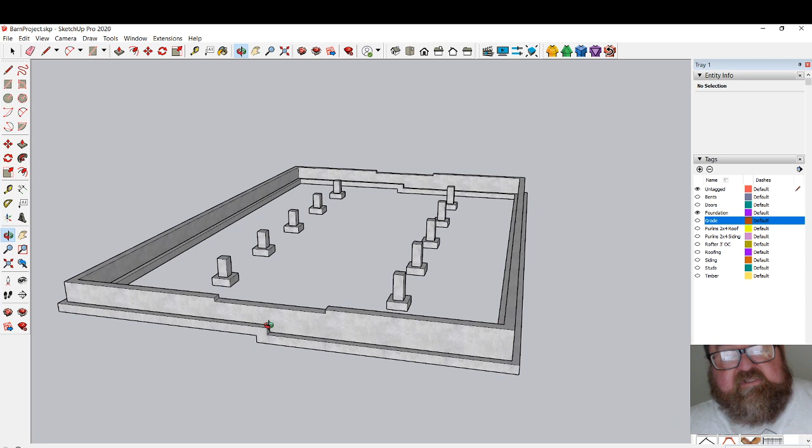But first, let me explain what I'm doing with this. I'm putting into the budget, or at least one step in the footing, in case our site is not perfectly level. So if we do get it graded perfectly level and we don't need a step down in the footing, then this foundation will be cheaper. So that's the point of that.

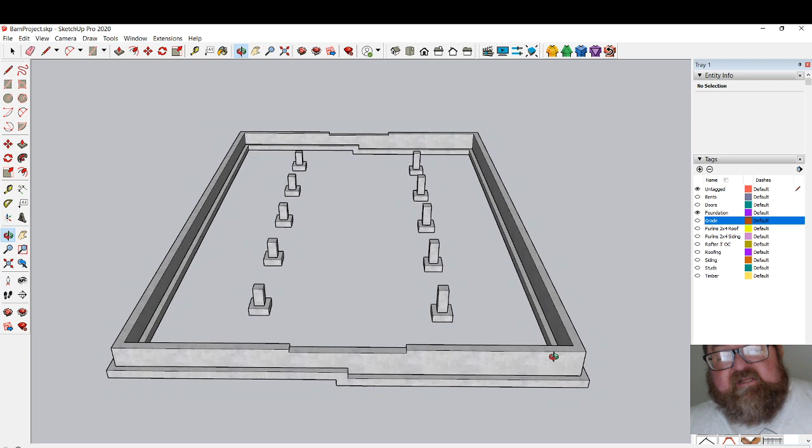I'm kind of assuming it's going to have maybe at least an 8-inch fall over. I mean, this is like 60 feet. This is a big barn, okay? It's 40 feet by 60 feet. When I say big, I'm talking about typical barns for this type of use.

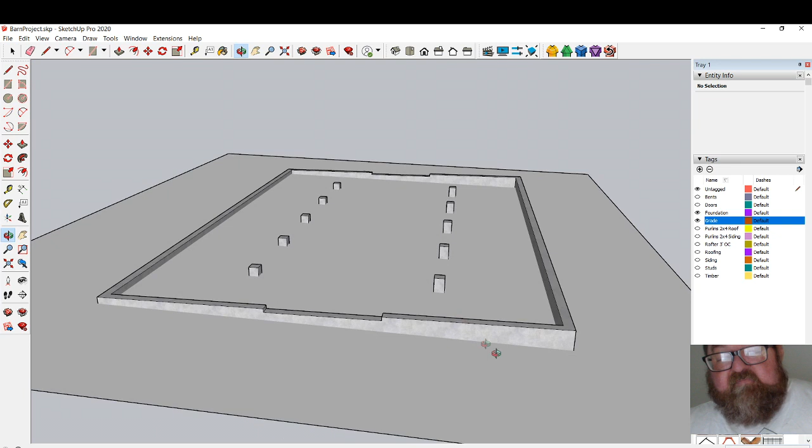But anyway, let's turn on the grade here. That's kind of where I'm assuming the grade might end up. Again, if it ends up being perfectly level, which you don't necessarily want, you want at least the grade around your building to slope away from the building a little bit. But that would be our budgeted grade or our estimated grade. And then that would allow us to have our barn up out of the ground.

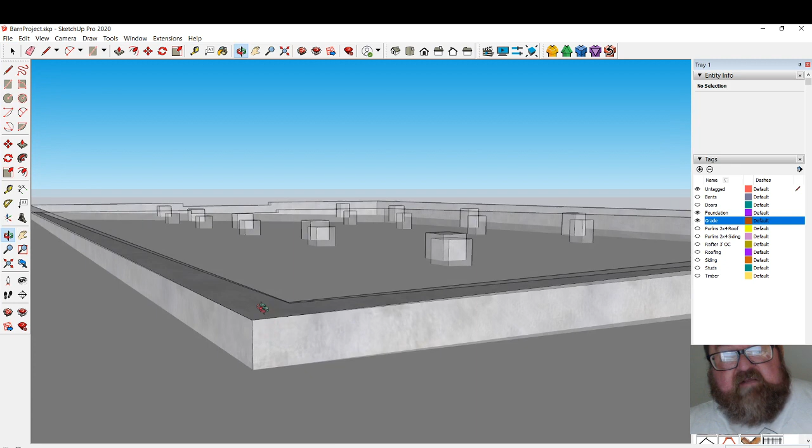You see a lot of these people that make barns that are for just typical livestock uses. They'll just pour footings in the ground and the post will come right down to the ground, and there's really no way to seal out critters, and you're going to see that in a minute.

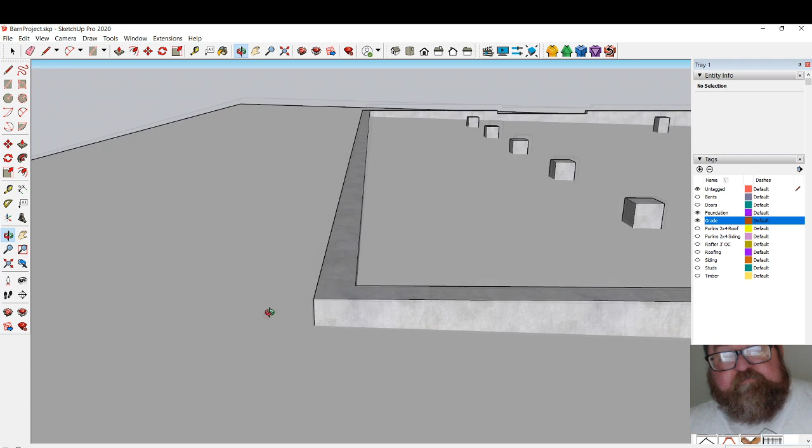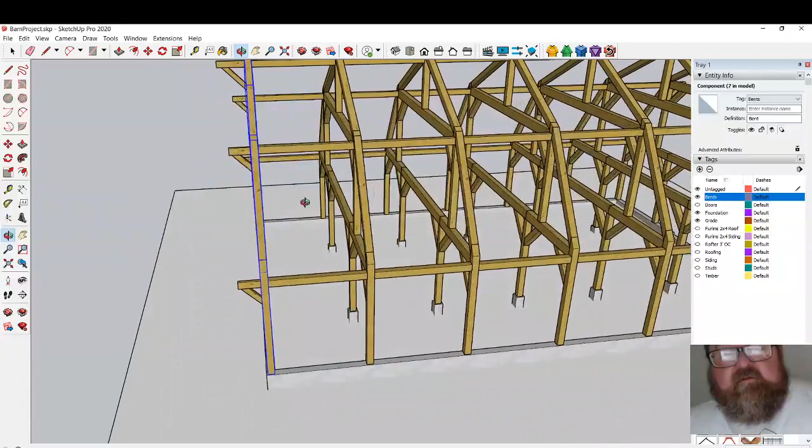So the next thing let's look at are the bents. And those are here, which is our superstructure for the barn. The actual bents are these individual bays of timbers here, like that. And I'm looking at possibly actually stick building these because they're so large.

And I talked to my crane guy. I actually had him watch the video. This is why we do videos. I can send them to people and say, look at this driveway. Look how far it is. Look at the condition. Can you get a 50-foot boom truck back here?

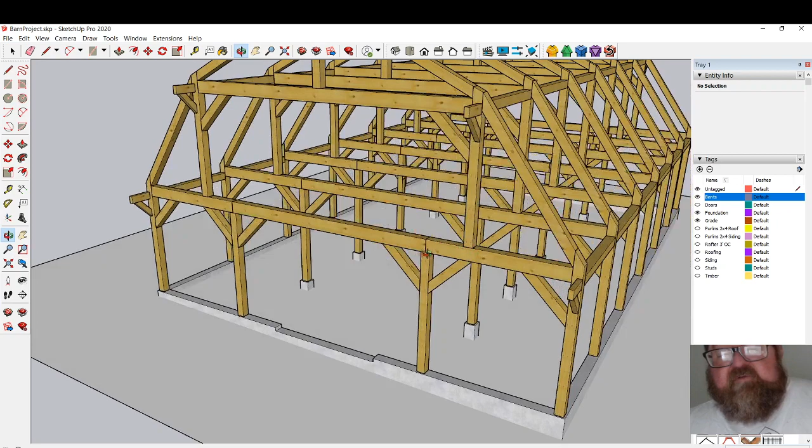And he's thinking about it right now, but I've got this plan B in my head where we would literally just stick build these bents. So we would put our 4 posts up, then we would put our beams on, these horizontal beams, and we would do that all the way across. And then we would sort of make this a temporary platform if he didn't want to put the joists in here. If he does want to put the joists in here, we would go ahead and put them up.

Then we would have a platform to work off to set these 2 posts on each bent, this one and this one. We would mount this beam. And of course, we could possibly mount this beam to the post on the platform we would build and then raise it up.

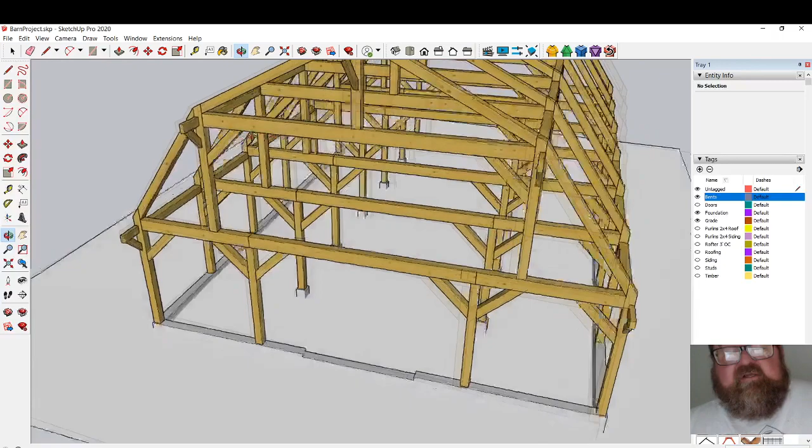And then once we got all that second story platform built, the rest of it's kind of easy because this is only - is it 6 feet tall? Yeah, 6'6", but easily managed by then. After looking at the site, I mean, it's funny about cranes. You know, these cranes can be huge.

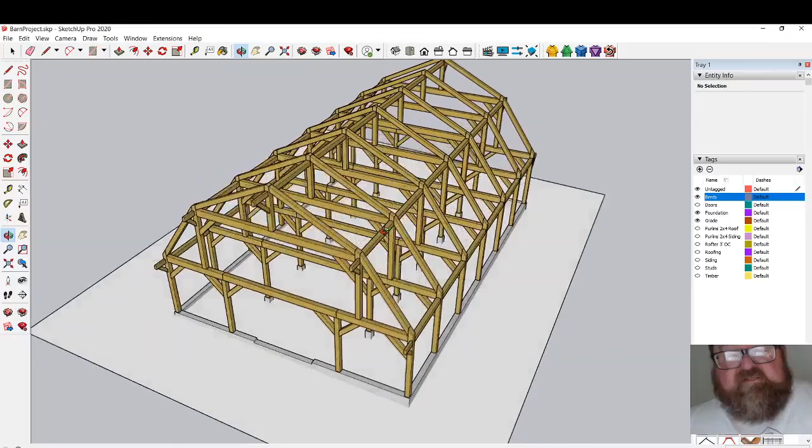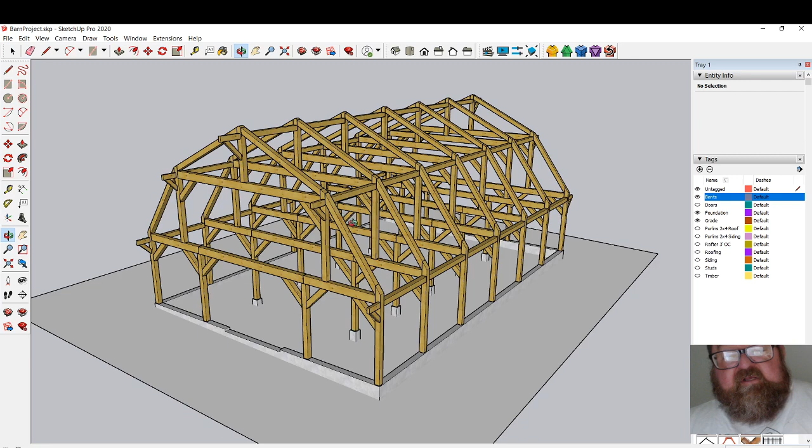They have different trucks, but we'll look at this, and of course, for the cost of the truck for a day, this is the kind of thing you have to decide. Do you want to pay $1,000 for one day, or maybe $1,000 for 2 days for a crew to be able to do it? In other words, the cost may end up being close to the same as far as the labor. Because even if we build these bents on the ground like you would traditionally and stack them up, you still have the labor of that. So anyway, that's just information for the owner to be thinking about.

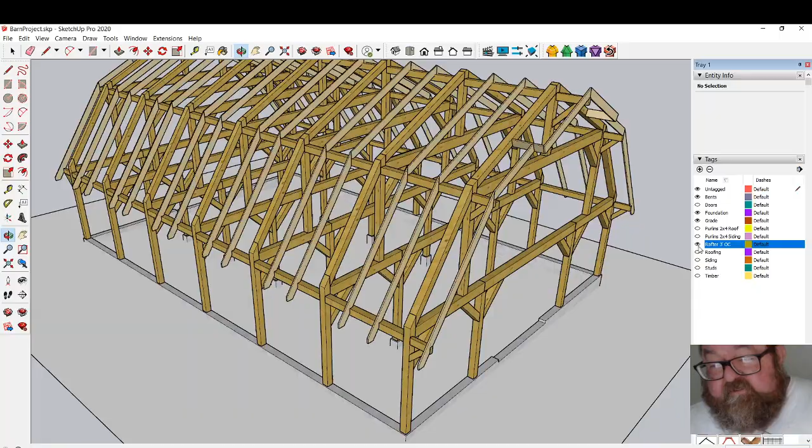So once we have our superstructure up, we would have these intermediate rafters. What those are going to do is just support the purlins, because a 2x4 purlin won't span 10 feet, you'd be like a trampoline in the middle of the span if you ever had to walk on the roof. Of course you can't walk on this roof, but that's just a medium density framing method to support the purlins.

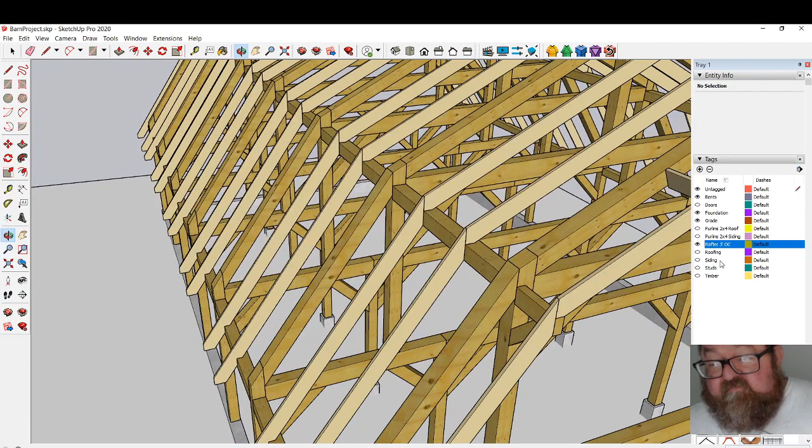Which I'm going to turn on next, roof purlins. There we go. So you can see they form the structure for the roofing to sit on.

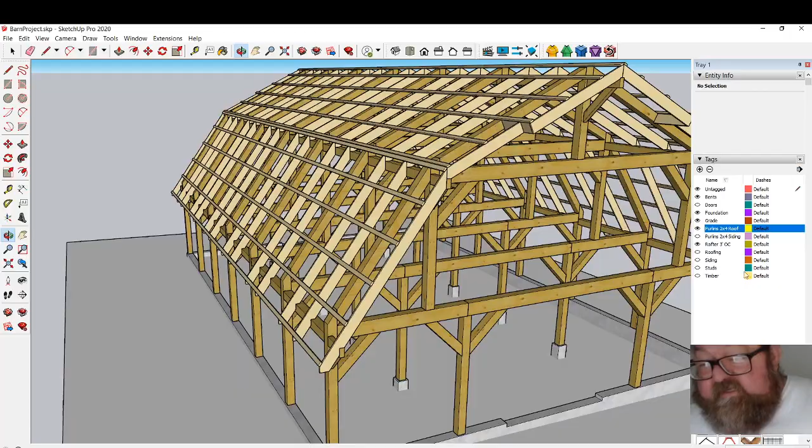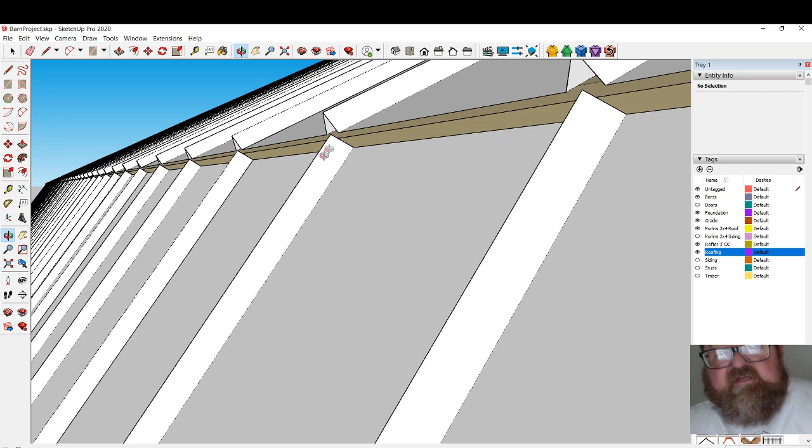And then let's just go ahead and turn on our roofing, which I'm showing just a 5V metal, that typical metal. And then you have your edge flashing to cover up the edges. I'm going to come up with a detail up here where there's a piece of metal that comes out and laps over this lower piece at least 3 or 4 inches, and then this roof goes on top of that.

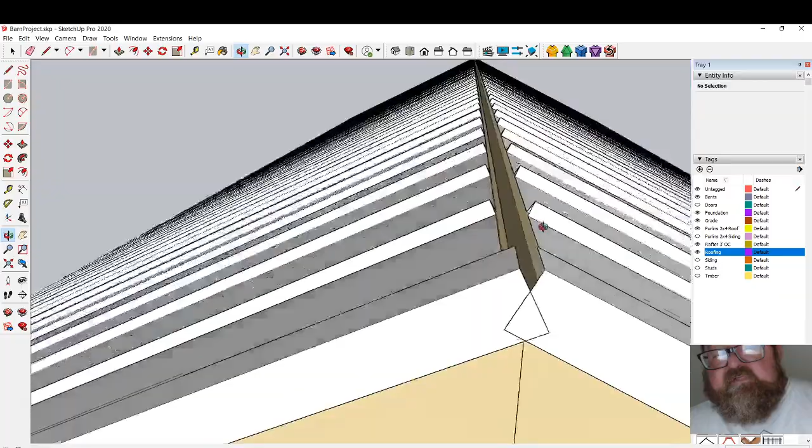That would be your connection between, I don't have that shown yet. I got to put that in there, and I also have to put the roof cap on, which is just a bent piece of metal that sits on top and gets screwed down.

Okay, and then we have this kind of neat detail. I've always liked this, where part of the roof, and it's mainly, I've always thought this was to protect the door below. Let's turn on, if I can get my scrolling going good here, let's turn on the studs.

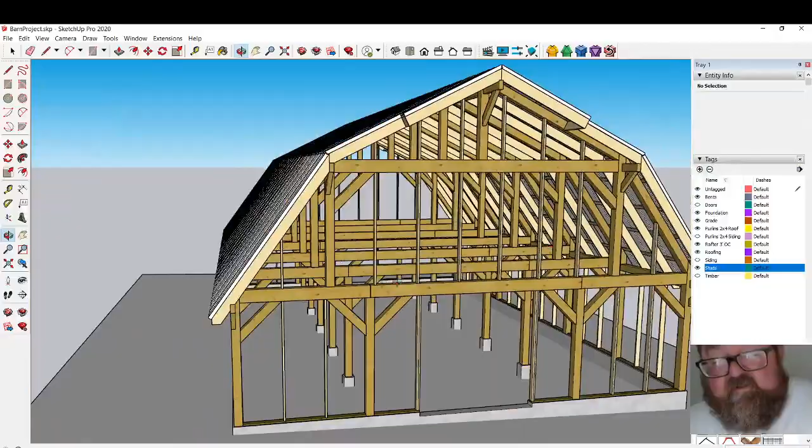So the studs are kind of the same thing as the purlins. They just form sort of a backdrop for the horizontal purlins for the siding. And they're still spaced out pretty good, it's not like we've gone in there and put them on 2-foot centers. I think they're on like 3-foot centers. It's just enough to keep your siding from being wonky.

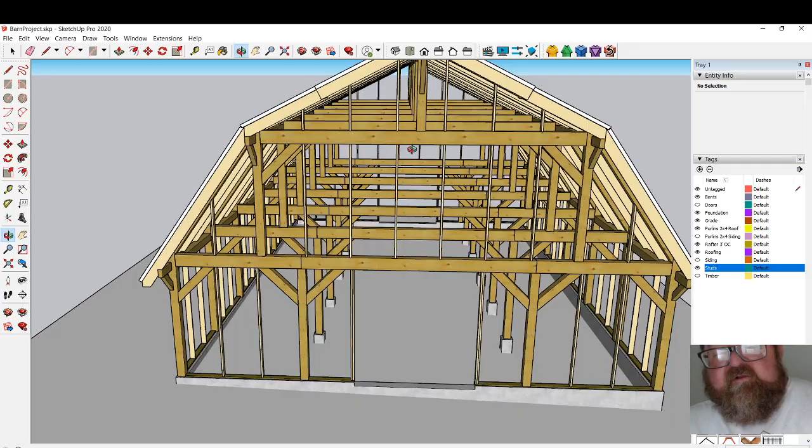But the reason I wanted to turn them on now is to show you this 10-foot door and how this extra overhang up here, get it at an angle where you can see it. It may need to come out, may need to run it out another foot. I think it's sticking out 3 feet right now.

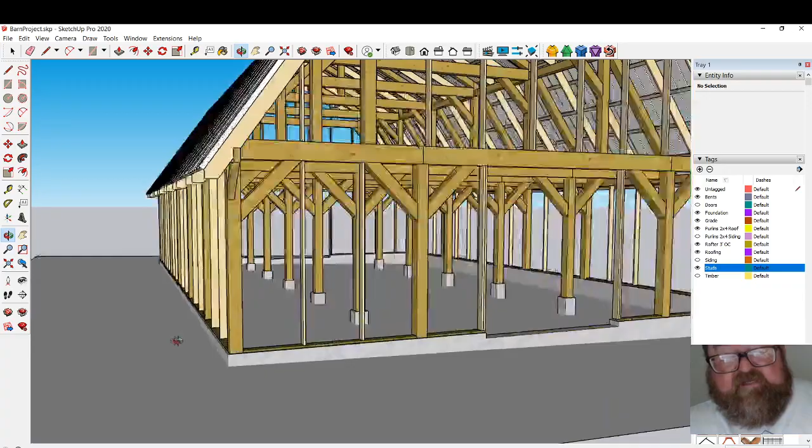They want this barn to be good and weatherproof, for almost like a situation where you could build part of it out to live in. And that's why I have the foundation the way it is, because now, since you have this nice foundation, your siding, let me turn on my side purlins. That's why I had the structure set back 1.5 inches. These purlins can come down and they're flush with the foundation.

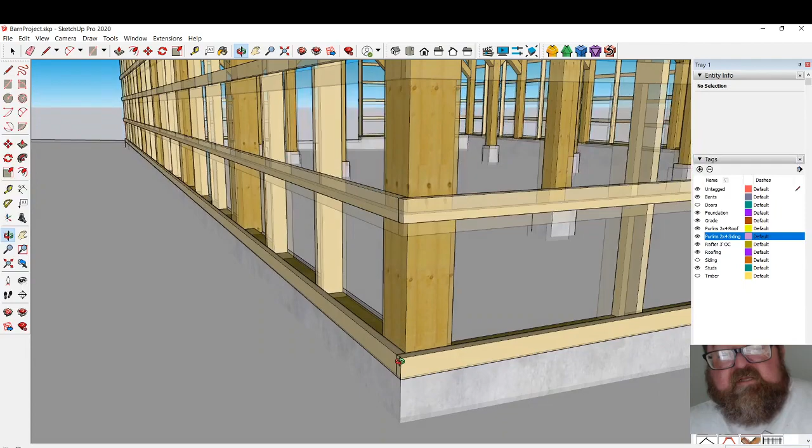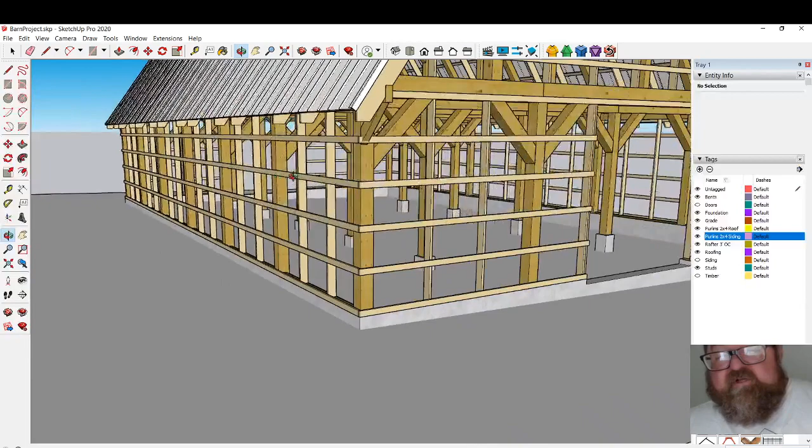Okay, and then of course, again, you see them running on 2-foot centers. We got the roofing, the roof purlins can be on 3-foot centers, but I think if we're going to have board and batten, we need the horizontal siding purlins to be on 2-foot centers, which actually works out pretty good because you got a 10-foot door, and one comes right to the top of the door, and it worked out pretty good. Helps form the opening for the door.

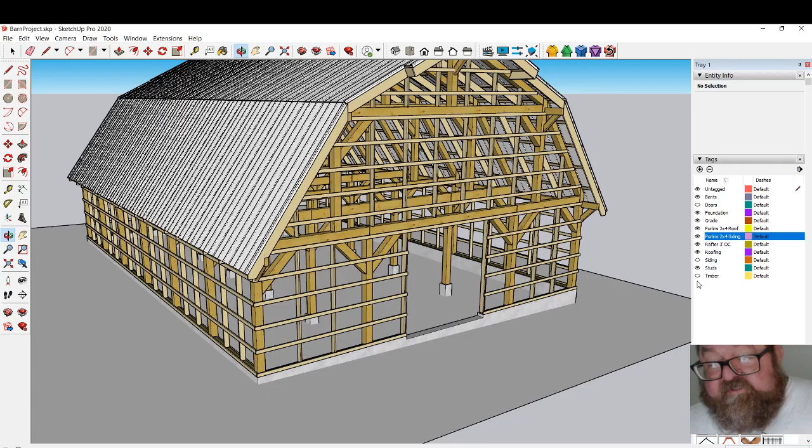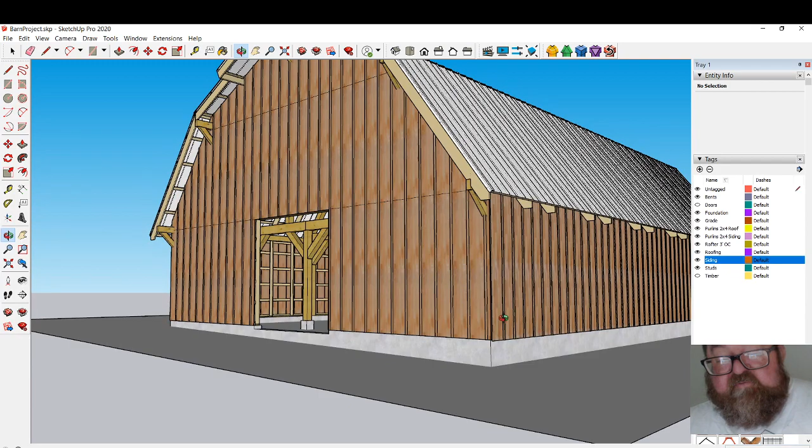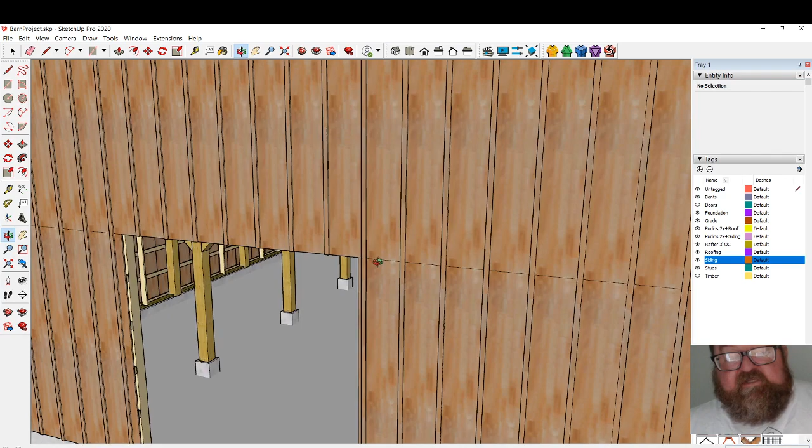But these lines coming across here would be your 10-foot boards. So 10-foot boards would go all the way up on the sides, but at that line you would just have a row of like Z flashing behind the battens. Unfortunately, we won't be able to get boards long enough to cover this whole front, so it's best to plan it out ahead of time, where it makes sense to stop them at the door height and then go another 10 feet and finish it out like that.

And then our doors, we need to come up, I was going to put a sliding, like a typical barn door, but if you ever want to weatherize this thing in the future, you would be better off having hinged. I don't have the hinges shown yet, but just two leaves, two big leaves that would swing out around these doors.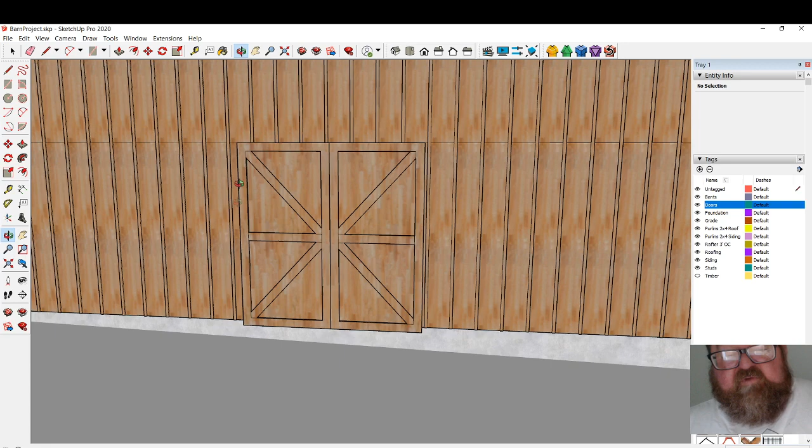You can weatherproof them better. A big barn door that just slides back and forth, I don't know if you're not familiar with those, they're not, you can't weatherproof them. The track for the door makes the door hang out away.

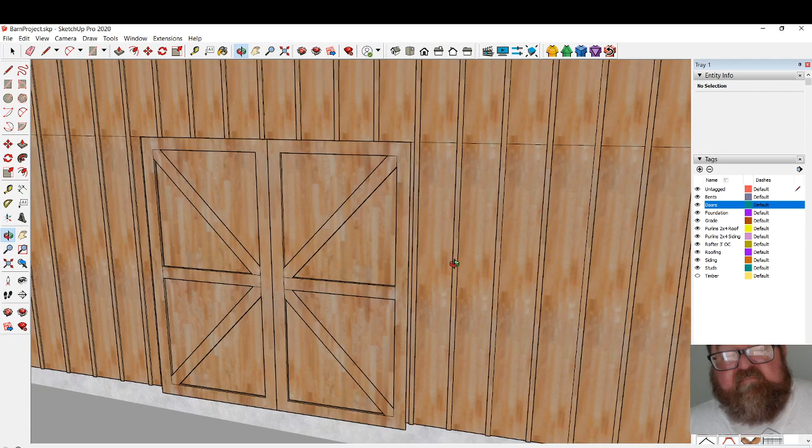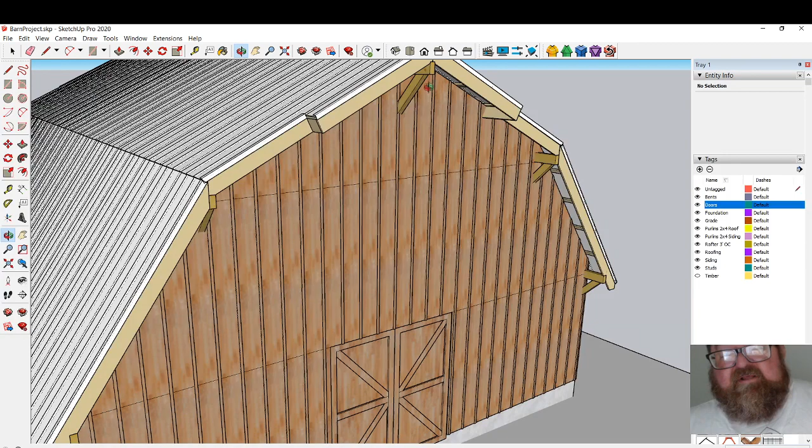Obviously it has to clear the battens, so when you close the door there's a big gap around it. And they're meant for just barns, like you keep animals or hay in. So that would determine what type of door you use. And of course, in a lot of barns you'll see a loft door up here, and that was a question. You'll see a pulley up here and a rope, and they use that for loading the loft with hay and stuff. But we would need to decide if you want that look.

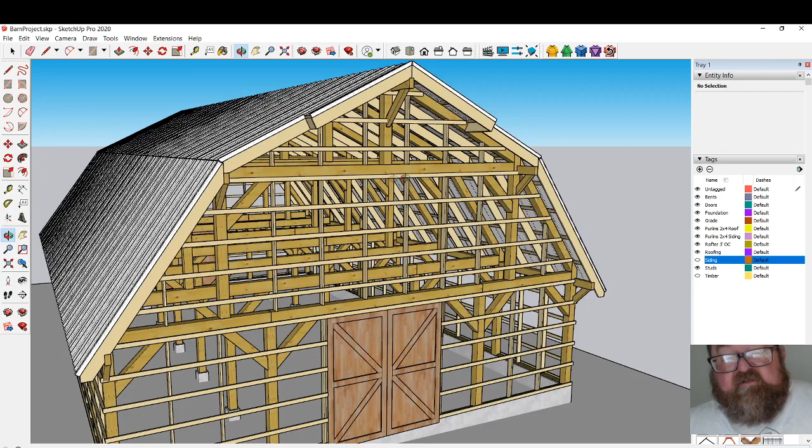Let's turn off the siding for a second and see. But it would be right about here, maybe between these two studs or something like that, because you've got your bent structure, so that would act as the header for the opening.

So actually it would be that line right there. That would be the top of the door, and then you just decide how wide you want it to be, if you want one. I show a door on the back too. I don't know if you want a door on the back of the barn, but it seems like it would be handy. So anyway, that's where we stand now.

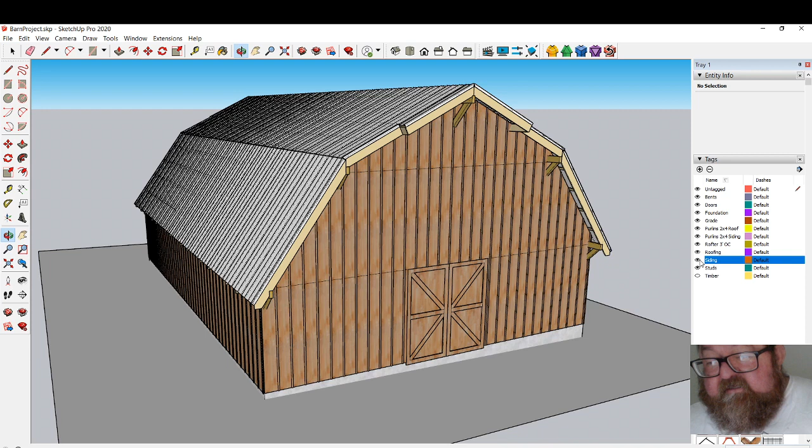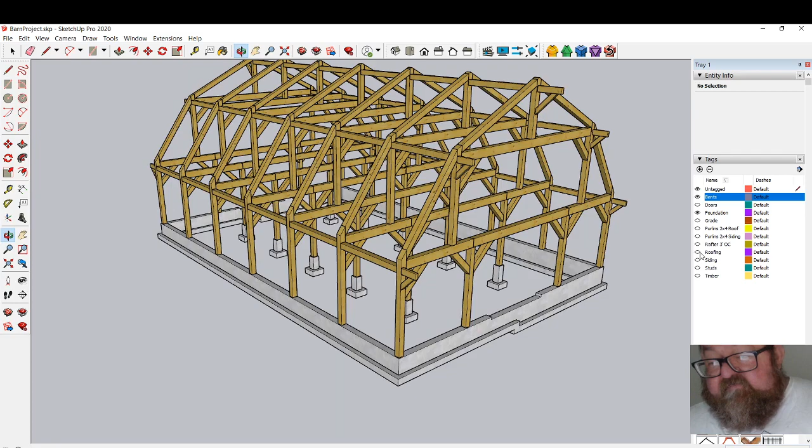So what I'm going to do this week is get prices on all this. Let's turn our siding off, and first I'll turn on the foundation. My foundation contractor is going to price this, and then I'll do a material takeoff on all the heavy timbers, because that's a different supplier for the heavy timbers. And then I can just get the regular framing lumber, these rafters and stuff, from my typical lumber yard that gives me good prices. I'll try to get all this taken care of this coming week, and hopefully by the end of the week we'll have your budget wrapped up.

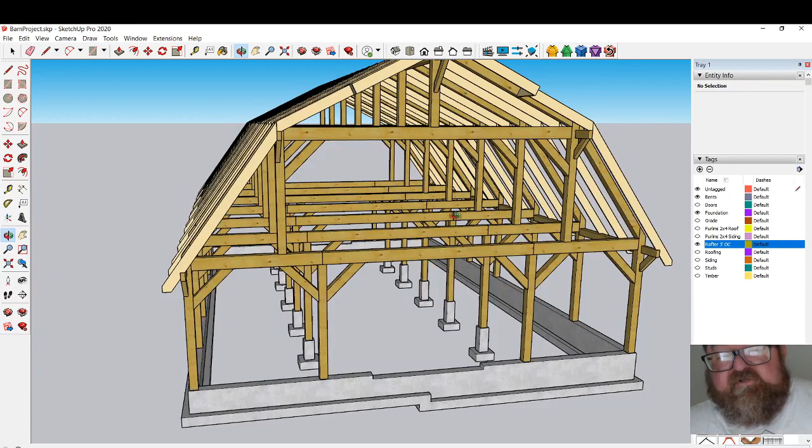And I'll make another video where I start to set up views. What you do is just set up different views, like that would be the front, at the front, and then you turn it to parallel projection like that, and use a different style. I like to use this style when I'm modeling because it's easy on the eyes. When I start doing construction drawings...

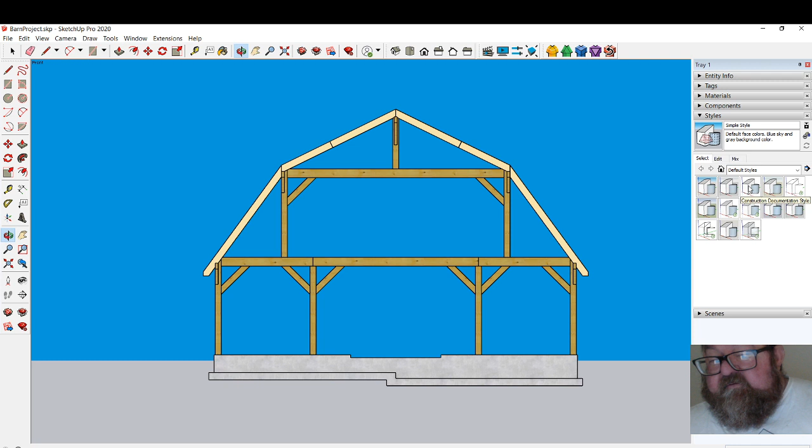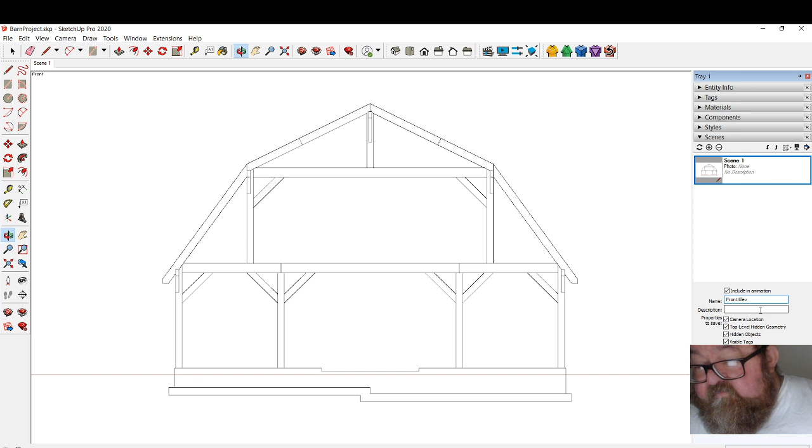There'll be something more generic like that, and that's what you typically see. As a matter of fact, I'm going to go ahead and save this as front elevation scenes. So what we do here is just add a scene. Let's see, front elevation, I usually just abbreviate it like that. I go over here and say update. Okay, and then I'll go to the side.

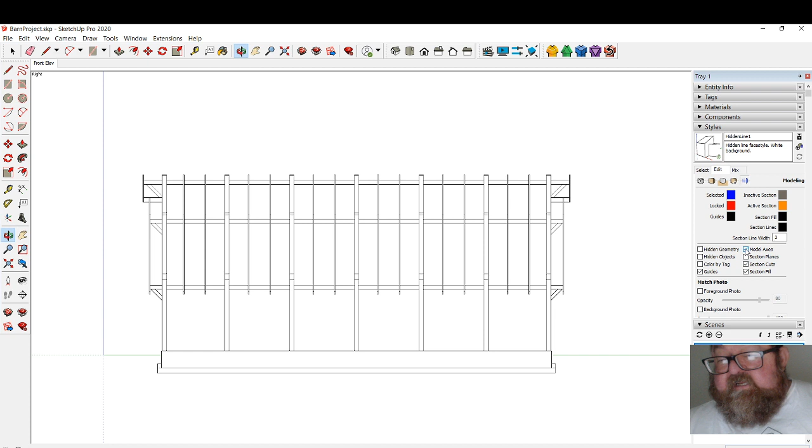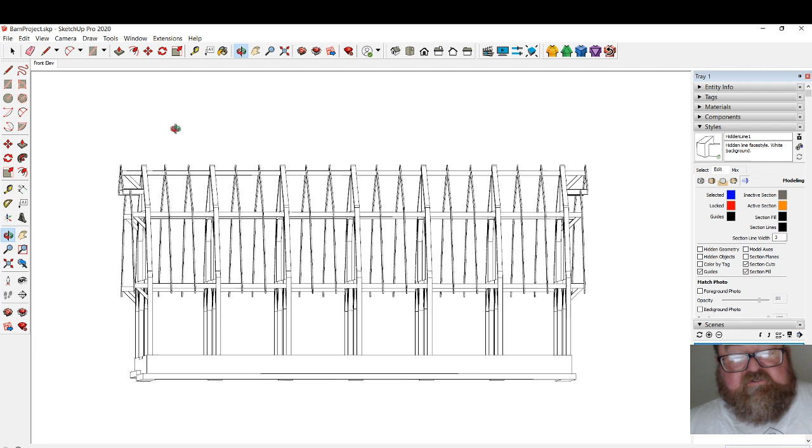See, here you can see the bents, the rafters. We'll kind of set that view up. I always have to turn the model axes off, I don't like that, and I haven't saved that yet. So there we go, and that would be... that's the difference, I accidentally clicked on parallel projection instead of perspective. But for construction drawings, it should look like that.

And contractors are used to looking at boring drawings like that. So this would be, we're going to call this typical side because they would be the same. Let's call it side elevation. Okay, and we'll update that. See, then we can just flip back and forth between those.

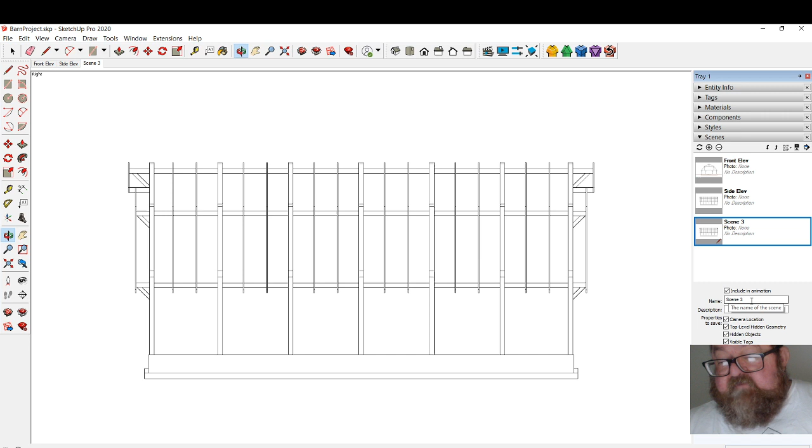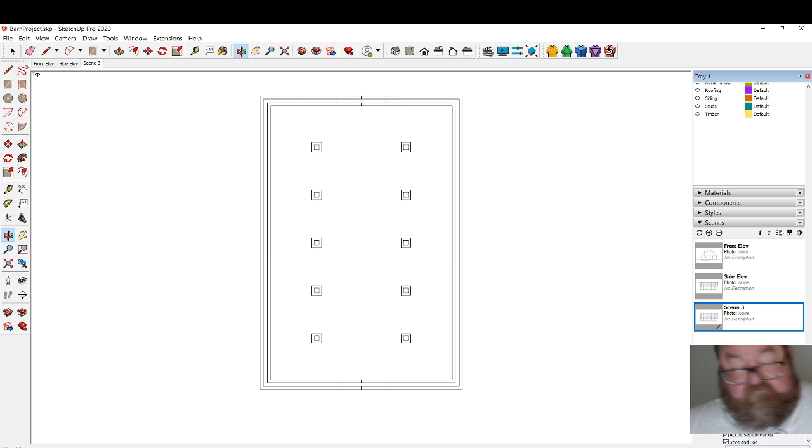And then we would have, let's go to a top view, and did I have it turned that way? I guess I did, but I'll go and turn off the rafters for the foundation plan. Anyway, we would do it like this. Okay, so that would be your foundation plan, and that would go up first.

So I moved it over there, and so on. I won't bore you with that whole thing. But then what I usually do is I'll have one called working. Did I update that? Let me update that, make sure. And then, or I'll just call it work.

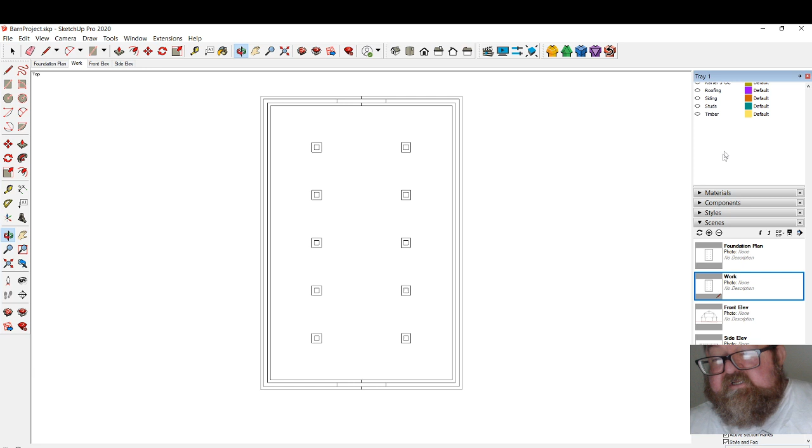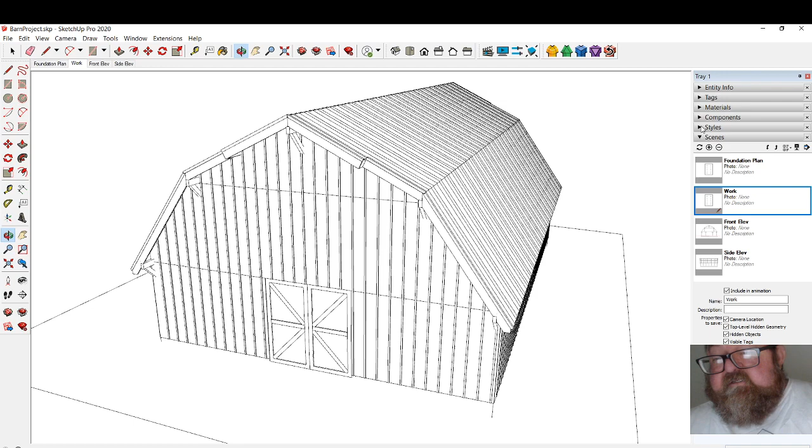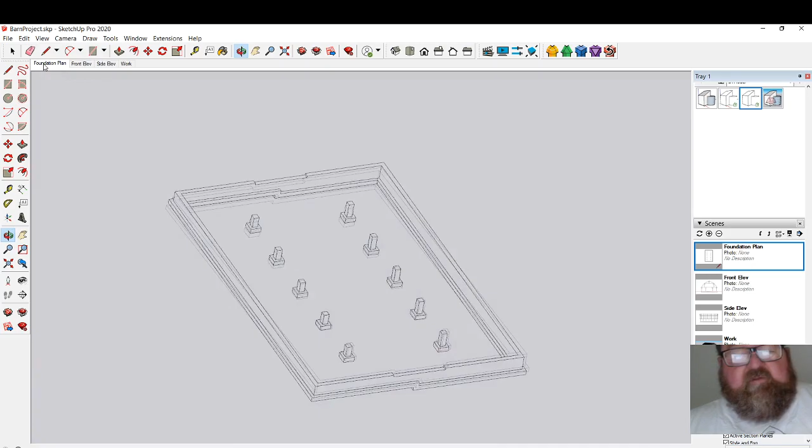And the work view is just all the layers turned on, in a perspective mode. It's kind of like how I was showing in the video, and it would be this style, yeah, this one - this would be kind of my working view. It just turns all the layers back on. So where did I do it? Right there, oh I see, and it goes down at the end, and then update that. So then I can just flip back and forth like that.

But I don't use those views to work on it, so I use this one.